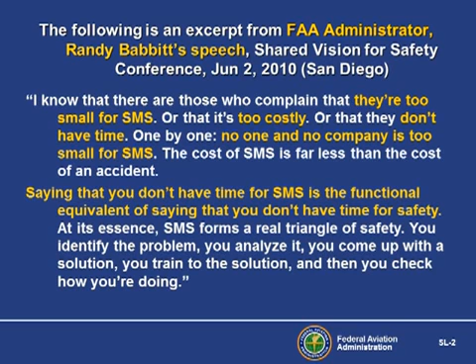There are many different ways to implement an SMS. This presentation shows only one method of how an SMS might work at a small aviation service provider. The focus is on the key elements of an SMS: safety risk management and safety assurance. Safety policy and safety promotion will be discussed near the end of the presentation. This presentation is not the only SMS method available to aviation service providers, but should provide you with some ideas.

Let's look at an example. Alpine Air is a fictitious company. However, as you will see, the application of SMS at an Alpine Air-sized organization is simple enough, as long as you understand the safety risk management and safety assurance processes. Two important points. First is that knowledge of the safety risk management and safety assurance processes is what's important. How you document your SRM and assurance is not as critical. This presentation purposely discusses the need to understand safety risk management and safety assurance, and illustrates documentation only using simple hard copy paper tools.

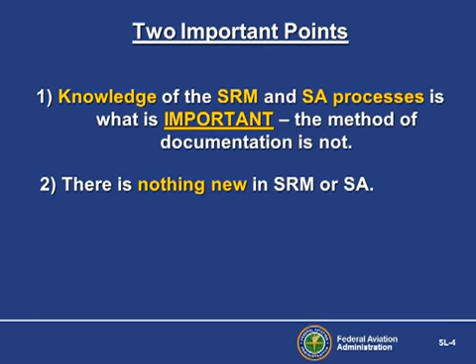One day, one of your pilots walks into your office and says, "Boss, I was flying over Alpine just now and I saw a new power line across Harbison Canyon. The worst part is, there are no visibility markers on the new line." So what has just happened? You have just started your safety risk management process. What can you say about your SMS so far? You have an effective employee reporting and feedback system. Let's track our example through the safety risk management and safety assurance models.

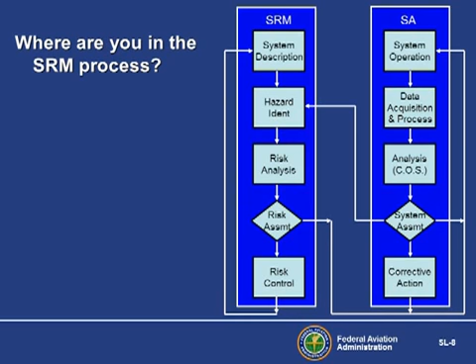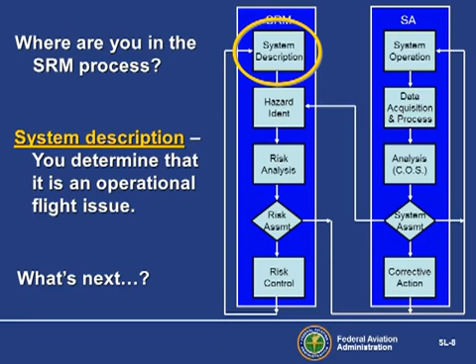So where are you in the SRM process just now? That's right, you are describing the system where the hazard resides. What's next? You need to identify the hazard. What's wrong? You ask the questions who, what, when, where, and so forth. Before you forget, you open your simple SRM notebook and write System: Operational Flying Area; Hazard: Unmarked Power Line in Harbison Canyon. Now it's time to analyze the risk that this hazard poses.

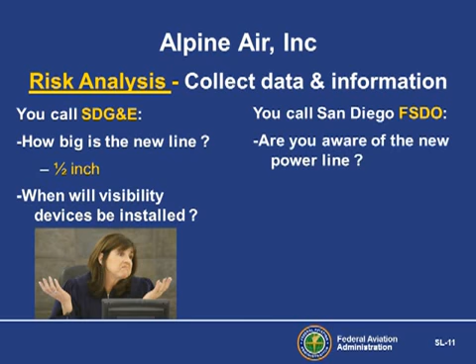You need some additional information, some data. You call the electric company, and you ask, how big is this new line? 1/2 inch, they reply. When will you get visibility markers installed? There's silence on the other end of the phone. You call the FSDO and ask, are you aware of the new power line? Yes, they say. Can you do something about the visibility markers? Again, yes, but it'll take some time. You are still collecting data at this point.

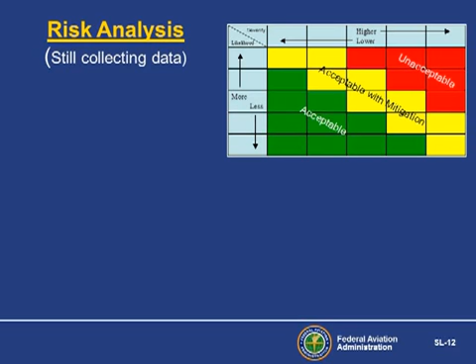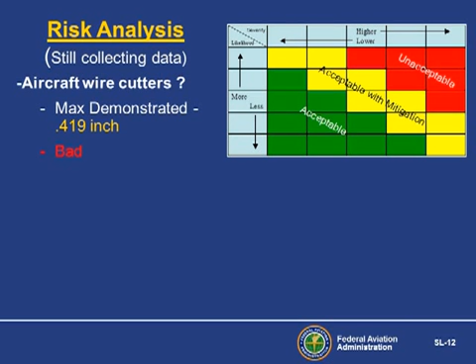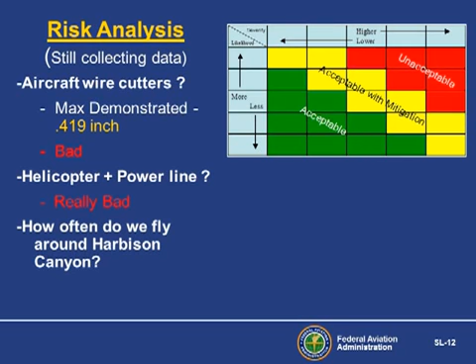You find the operator's manual for the wire cutters on your helicopter and find that the maximum demonstrated cutting capacity is 0.419 inch. That's bad. You think about what happens when a helicopter and a power line interact. That's really bad. Now you already know how often you fly through Harbison Canyon, and that's a lot. So, what is your severity and likelihood for this hazard?

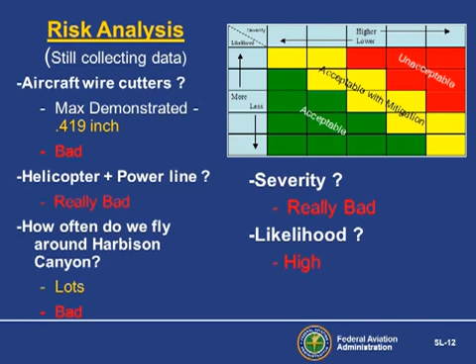Now it's time for the risk assessment. Is the risk acceptable or unacceptable? Looking at your data, this is pretty simple. Your risk is unacceptable. How much time have you invested so far in this SRM process? 5 minutes? 10 minutes? Have you done anything you've never done before? Something new?

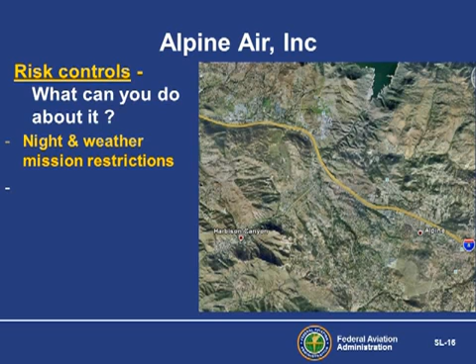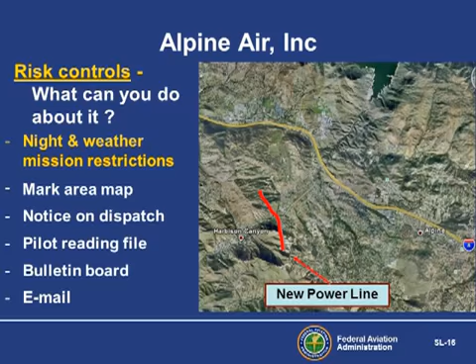Now that you have assessed your risk and found it unacceptable, what can you do to mitigate that risk? The most obvious is putting mission restrictions on flights in or near Harbison Canyon, especially during times of low visibility. You can mark the location of the new power line on the big area map on the wall of your lobby to remind everyone. What else can you do? How about putting reminders everywhere you can think of? Okay, time to bring your documentation up to date. This is a summarized version of what you might have written so far.

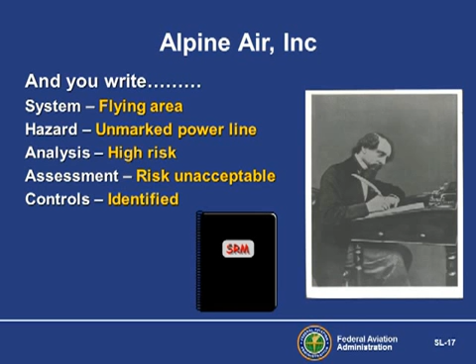With your authoring duties complete, are you finished with the safety risk management process at this point? Not yet. You need to consider residual and substitute risk. In other words, is there any risk left over after you apply your controls? Or have you introduced a new hazard while applying your controls? Is the cure worse than the disease?

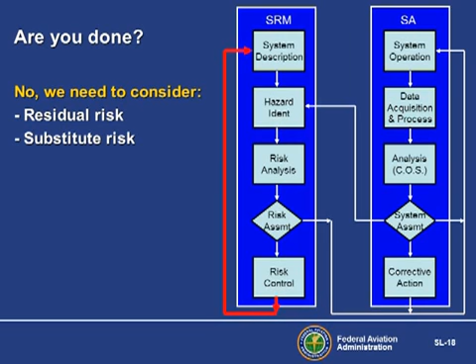This can be, and frequently is done, while you're developing your controls in the first place. So just be aware that you have considered this residual or substitute risk. So how did you or do you consider residual and substitute risk? You can talk to your employees, brainstorm with them, even populate your calendar with notes to yourself.

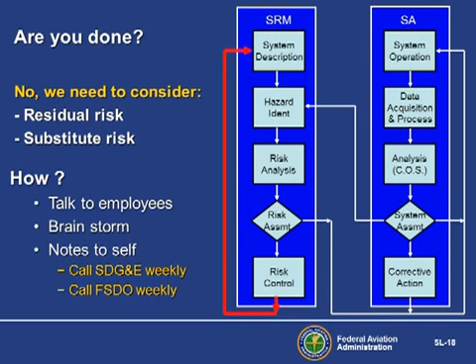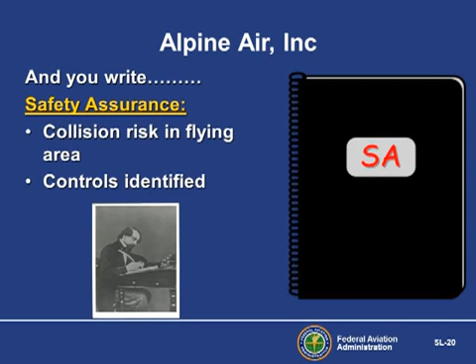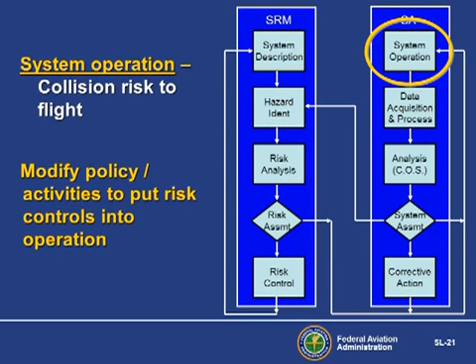Now are you finished with the SRM process? Yes. So what's next? Let's take a look. You take out your safety assurance notebook and write about the risk and associated controls. Now that you have defined your risk, it's time to put your controls in place to make them operational. What's next? The next step is to consider how you will assure your controls worked and continue to be effective.

How do you do that? You have many options, so let's look at some of them. Your SMS will help you to consider which method might be most effective. You can choose more than one.

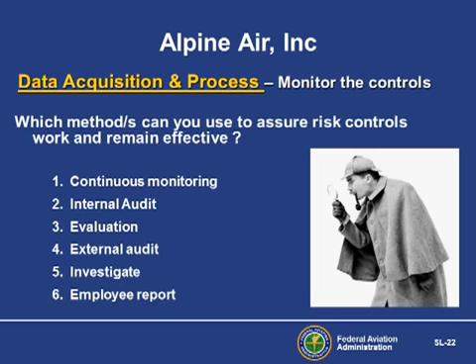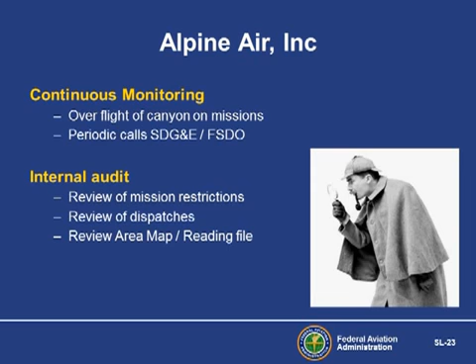Using your background and experience, you decide that continuous monitoring, checking the status of the power line by overflying the canyon during good visibility missions and becoming a squeaky wheel at the power company, and internal audits fit your needs best. Now that you have made your monitoring decision, break out the pen and paper and document it.

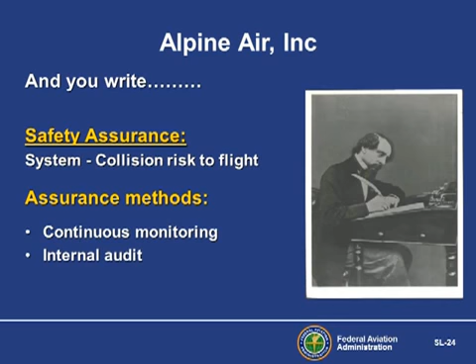Okay. You know what you want to do, but exactly how are you going to do this monitoring and data acquisition? Overflying the canyon and looking at the power line from a safe distance is simple enough, but how about this fancy term, data acquisition? Data acquisition is simply the information you gather each day while operating your business. It includes mission orders, flight plans, fueling reports, maintenance reports, safety notices, and all the other various bits of data that make up normal business processes. Now that we've acquired this data, let's analyze it.

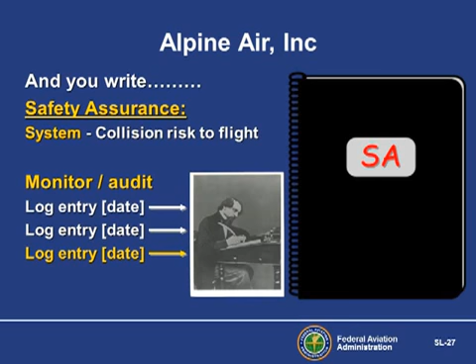Every month you pay the bills and review the financial, maintenance, operational, and human resource aspects of your company. Since you have an SMS, you also review your safety status at the same time. It's become second nature to thumb through mission sheets, maintenance logs, account balances, and the SRM and SA notebooks. You look for things that are out of place or dangerous, or trends that are going in the wrong direction. That is analysis. Each time you do your reviews, you make an entry in your notebooks, noting anything found and the dates. That's documentation.

Now how much time have you invested? What does it cost you? What has been your resource outlay? We are still looking for that something new, something you've never done before in your aviation career. Over a period of time, your analysis of the controls you have implemented to mitigate the risk of the unmarked power line justifies your assessment that your controls continue to work as expected.

You can sleep better at night because you know you have documented evidence that you're identifying hazards, assessing risk, implementing controls, and monitoring controls to ensure their effectiveness. You are confident that you are exercising due diligence and have one of the safest operations on the airfield, a fact you bring up to your insurance company at policy renewal time.

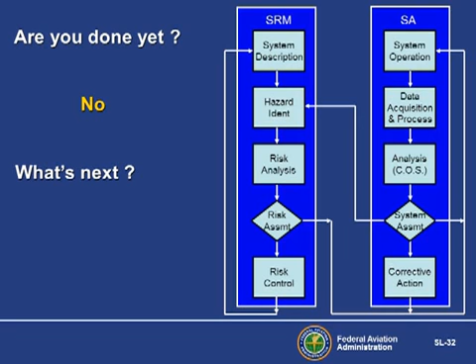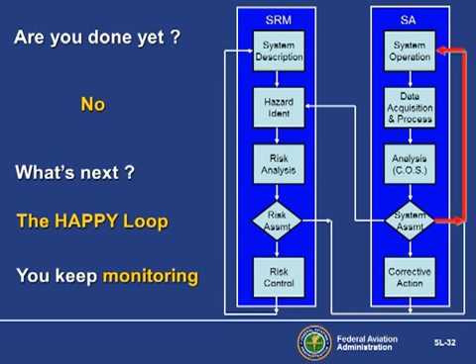Are you finished with the safety assurance process yet? Not quite. So what's next? You got it, the happy loop. Looking at the system in operation, acquiring data, analyzing that data, and assessing that the system is doing what it's supposed to do. You continue to monitor your risk controls on a routine basis.

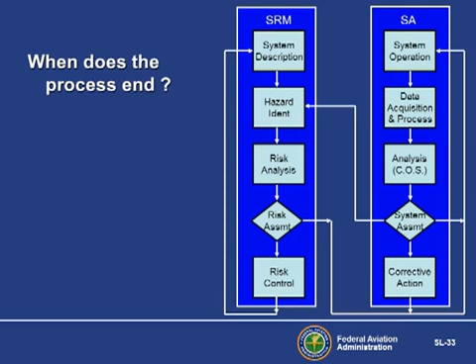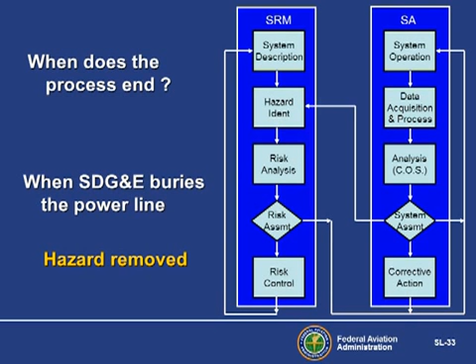So when does the process end? Will putting visibility markers on the power line eliminate the hazard? Or just further mitigate the risk? You're right. Burying the power line is the only way to remove the risk. In other words, remove the hazard. Visibility markers are just another risk control.

You now have safety risk management and safety assurance well covered. So what about the other two components of your SMS? Safety policy and safety promotion. Let's take a quick look. Safety policy and objectives. You've had that in the front of your reading file since you set up your SMS, and you review it periodically.

How about management commitment and key personnel? That's easy, it's you. Emergency preparedness. You've got a company emergency call roster and everyone has their pocket in case of emergency card. Documentation and records. Got it. Safety promotion. You do that.